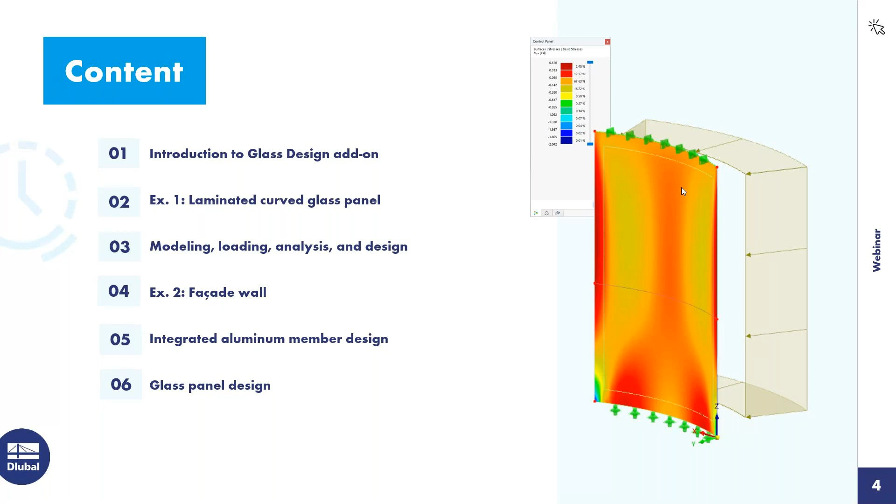Regarding the content over the next hour today, I want to begin with a brief introduction to the glass design add-on available within our program RFEM 6. We'll then move on to our first example, which is a simple laminated curved glass panel. We'll talk about the modeling and the loading, run a quick analysis, and carry out the design according to the ASTM standard.

For our second example, we'll move on to a facade wall. For this one, we want to integrate the aluminum member design along with the glass panel design, also according to the ADM standards and ASTM.

So let's turn now to a quick introduction to the glass design add-on. This particular add-on is seamlessly integrated within our FEA program RFEM 6. RFEM provides the analysis of our structure, including the modeling and the loading, but when we want to carry out the design of these glass surfaces, we do need this particular add-on.

This add-on also allows us to define monolithic or laminated thickness types, as well as working on the insulated glass design. We'll cover this more towards the end of our presentation today.

Within the RFEM 6 program, we have access to our material library for glass materials and foils, but you can also create your own user-defined materials. We have the ability to specify the shear coupling behavior between the laminated glass layers as fully uncoupled or release, or fully coupled or rigid.

We utilize what we call the laminate theory to calculate the panel stiffness, considering all of the various layers within a laminated glass panel. We apply the laminate theory to come up with the stiffness matrix for the overall surface. We'll see this in our example today.

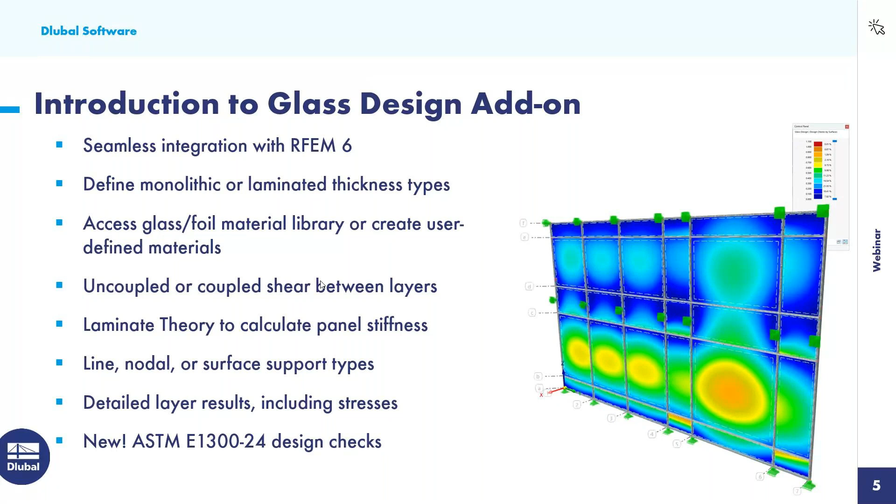We'll turn now to specifically the ASTM E1300 and how this is integrated within the program. The first thing to note is that we can generate the load combinations automatically according to the ASCE 7, but it is required that when we enable this glass design add-on that we choose the ASCE 7 glass load combination generator.

The reason why this varies from the standard ASCE 7 is that for our various load cases, we now have enabled the load duration factor. This is needed to carry out the strength design of our glass panels.

The IBC is also a little bit more clear about serviceability limits for glass or members that are supporting glass panels. So we are going to generate the load combinations for this type according to the IBC and Table 1604.3 for our serviceability or deflection checks. Again, this will make more sense as we move through our examples today.

From the ASTM, we are going to calculate the max allowable tensile stress for each surface. For this, we refer to table X6.1 and X6.2. This is dependent on the glass type, the load duration that we talked about within the load combinations, and the probability of breakage.

I would recommend that you reference the ASTM in this particular section because there are some assumptions made, such as a uniformly loaded glass plate, or limitations with thickness and size in order to calculate these max allowable stresses. If you don't fit into these particular criteria or recommendations, then you would want to use your engineering judgment, as perhaps a general stress design, which is code independent, would be better within the program.

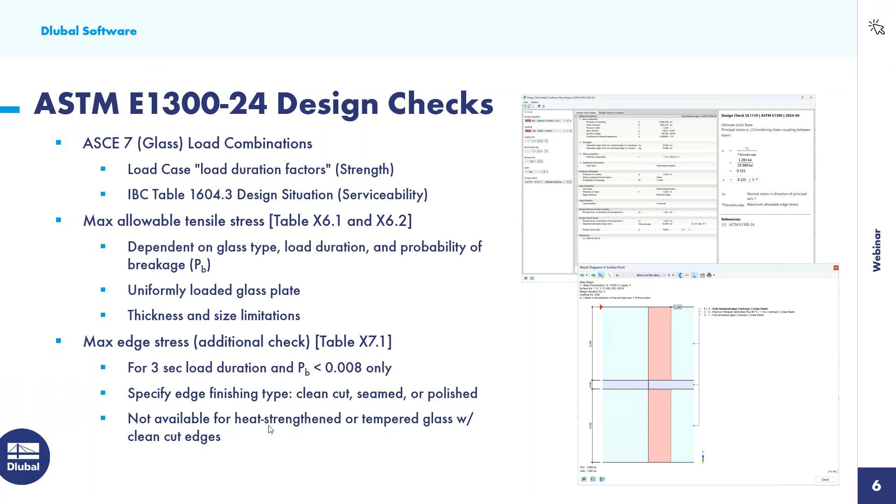Okay, so we will turn now to RFEM for our first example. When we do launch the main program RFEM 6, we will go ahead and give it a model name within the base data dialog box.

The second tab that is shown here are all of the various add-ons that we have available. So more or less, you can create your own software package that's specific for your design needs. For this first example, we will take advantage of the glass design add-on.

So under the third tab, this is where we can set our standards. The first one is the drop down to generate the load combinations automatically. And as mentioned in the PowerPoint, we do need to select the ASCE7 glass option here.

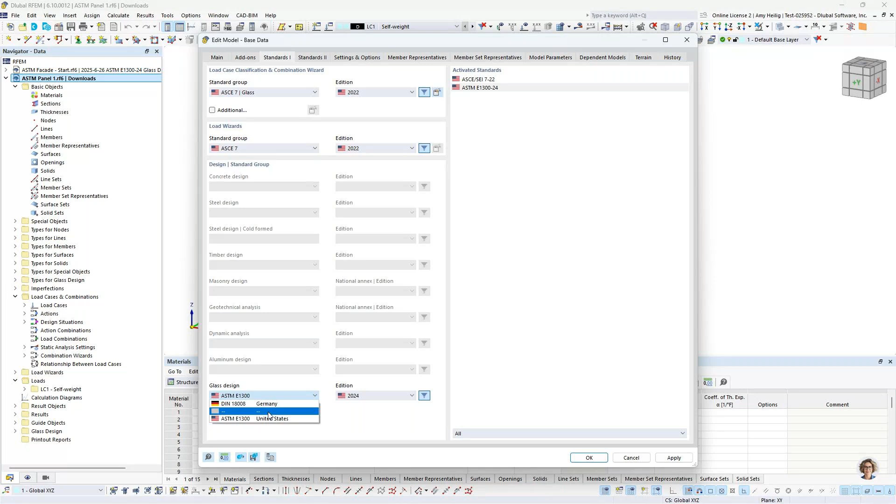The glass design dropdown, we now have the ASTM E1300, the latest 2024 standard. You'll also notice that you can choose a code independent stress design as well if you prefer. So once this information is input, we can click OK when we're brought here into the main program.

So we have our graphical interface to work with here at the center window. We have our quick tools up at the top. Our navigator on the left will include our input data as well as our results, or we can work with the table options down here at the bottom.

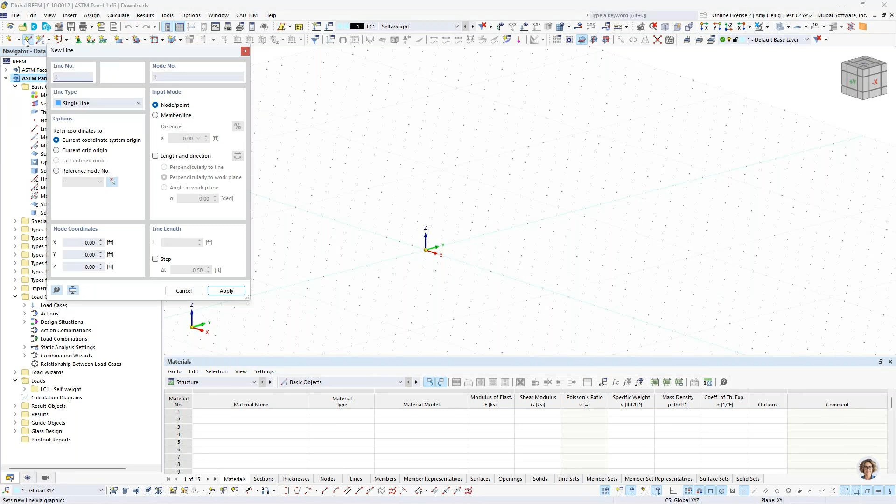So we'll begin first by drawing a simple line element. And a line element can be found up here in our tools. So rather than a straight single line, I am going to choose an arc where I can define here the start and end nodes as well as the radius.

So I'll snap here to the origin point. My second point is going to be 5 feet away in the Y direction. And then I want to either graphically select here what the radius is, or in this case, I'm going to reverse the orientation and directly type in the radius into my dialog box. I hit enter and that line element is complete.

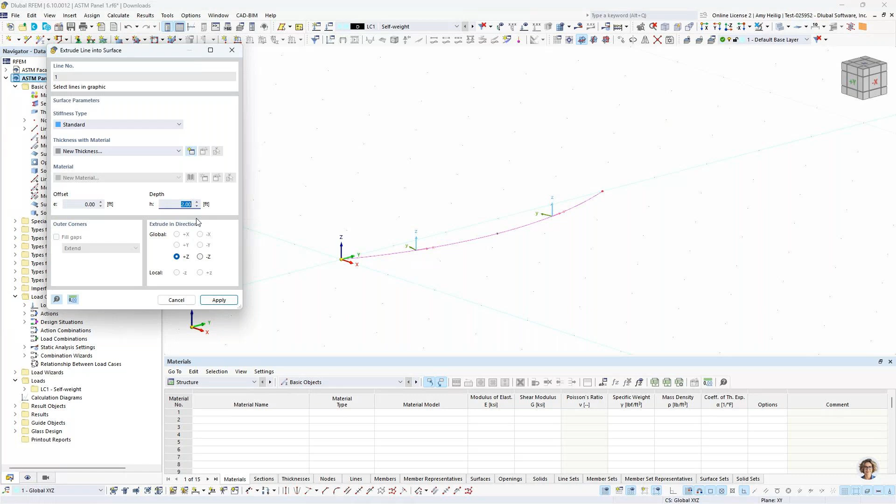So I right click on my mouse and I'm going to select this line element. We have the ability here to right click to extrude this line into a 2D surface. And I'm going to create my surface panel here that will be 8 feet in the vertical Z direction. I hit apply, I'll right click to exit out, and we have our surface shown here.

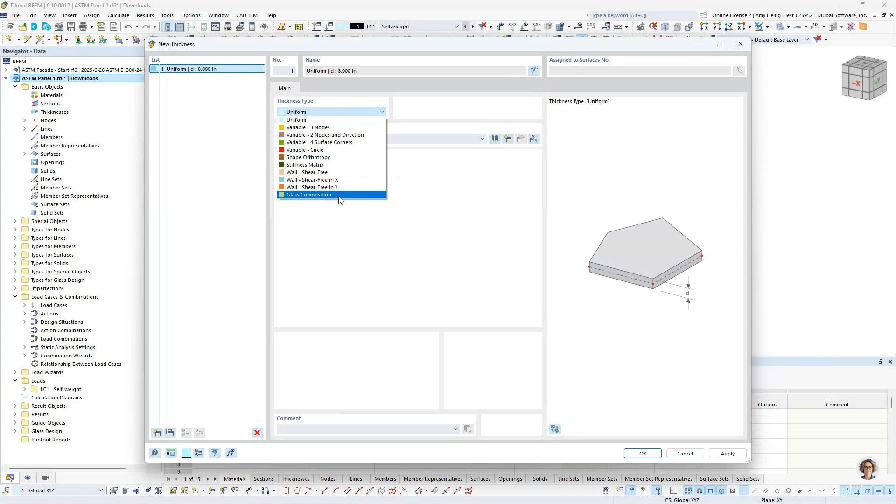Now it's currently displayed as red because we do not have a thickness or a material assigned to it. So we'll double click on this surface and we can assign here a new thickness type. We create the new thickness type within our dialog box, and under the drop-down is the option for glass composition. So if I did not enable the glass design add-on, I would not have this available option.

Under the second tab, this is where we can begin to create these layers for our laminated glass. And we'll begin under this first row for the material, defining here a new material, which we can select directly from our library. Over on the left, we have our material type dropdown that we can select glass, and we can further select the ASTM standard.

So we have 3 different glass types available here, including a fully tempered glass material. I can click OK, and that information is brought into here.

Now, if your glass material that you're using is not found in our library, what I would suggest is to choose one of the options as a template. And then we can always come down here to select user defined, and then we have the ability to modify the material properties directly. We can rename this material, but for today's example, I'll go ahead and use the material available to me within the library.

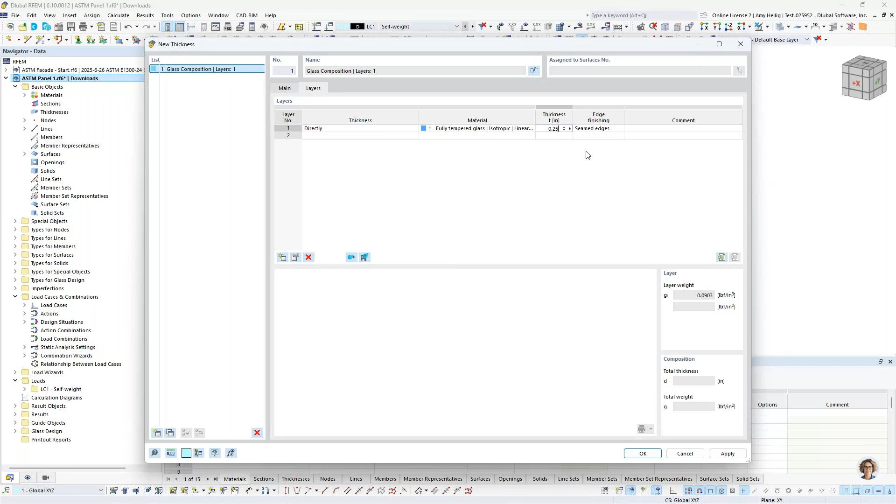The thickness type is going to be 0.25 inches for this first layer. And then the edge finishing. So you remember from the PowerPoint, we can go ahead and check those edge stresses, but we need to know what type of finish from this dropdown. So we'll go ahead and select polished edges for layer number 1.

Layer number 2, we will create a new material, once again, from our material library. And this time, instead of the material type set to glass, we're going to choose foil. Now, we do have some code-independent materials available, such as PVC, or we can use our drop-down here to select the ASTM again, and we do have the manufacturer SentryGlas implemented here. So we can go ahead and select one of these products.

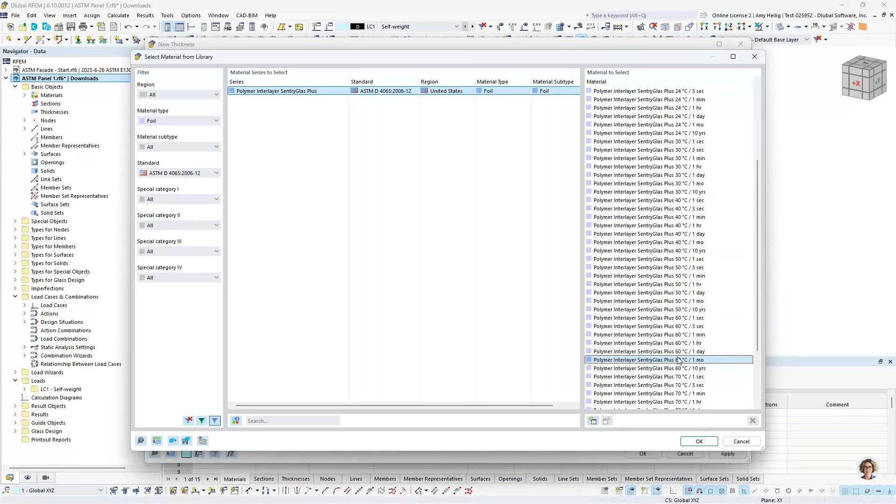I click OK, but once again, if you don't see your foil type, you can always turn on the user-defined option here. So we import that in as our second layer, and we're going to set a thickness of 0.03 inches. Our third layer is going to be the same fully tempered glass. It's already available within the RFEM model. I don't need to redefine that material type, and the thickness will be 0.25 inches here.

So a couple more things to note, that this is a very symmetric laminated glass composition. If it was not symmetric, let's say we had maybe a thicker or thinner layer 1 or layer number 3, we would want to pay careful attention here to the local z-axes shown and ensure that the local z-axes are oriented in the correct direction once we do assign this thickness.

The other recommendation is that if we're continually working with these same laminated thicknesses, with these same layers, is to save this to your library. So you can save it as a template, you can give it a name, and this way for any future RFEM models, you don't have to keep redefining these layers, but just simply pull them open from your template.

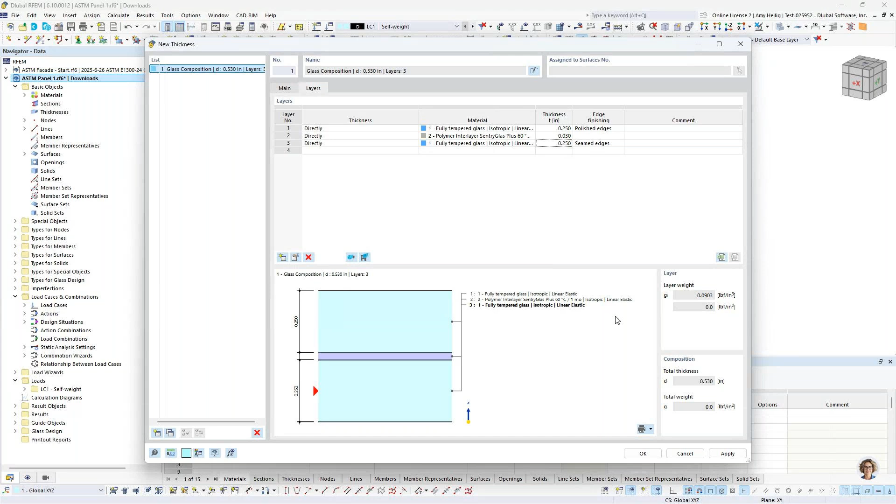So once this information is defined, what you'll notice here is that our surface is no longer red. It's now assigned a color because we have a thickness and a material also assigned to it. Now over on the left in the navigator, we have our various folders available to us, and one of them is the types for glass design. So the program has automatically created a composition when I have defined this laminated glass.

And this is going to be where we specify here the shear coupling behavior between the layers. And within this dropdown, we have fully coupled, which is a rigid coupling at the boundary edges, or uncoupled. So we'll go ahead and leave this as uncoupled for our example today. The third tab is the stiffness matrix.

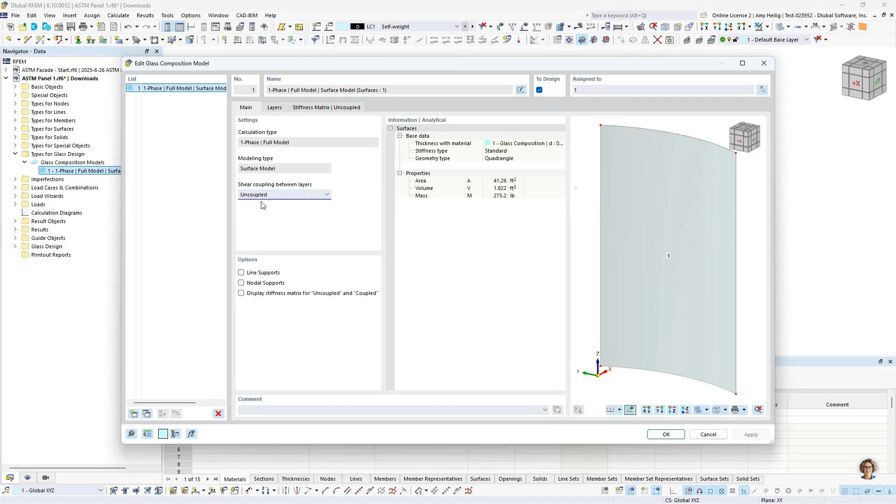So as I mentioned in the PowerPoint, we are applying what we call the laminate theory to calculate the stiffness properties for the entire panel itself. So we're considering all 3 of those layers. We apply the laminate theory, we determine what the stiffness is, and this is what we're going to use in the analysis within the base program. So very powerful in the sense of being able to calculate all of these stiffnesses automatically.

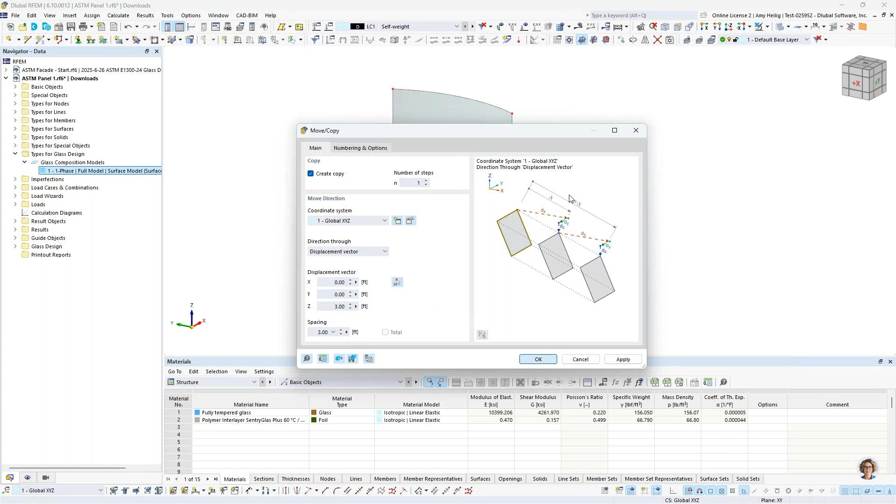So once this information is complete, we will continue with the modeling workflow. And let's assume that we maybe have some type of handrail on this glass panel that we want to consider for loading purposes. So I'm going to take this bottom line here, highlight it, use my Move Copy tool to make a copy 3 feet in the vertical direction, and I click OK. So now this line element will be fully integrated within this curved surface.

Now you'll notice a couple other symbols here for what we call surface cells. Those are not needed for today's example. So under our second tab within the navigator under special objects, we can go ahead and deactivate that graphically.

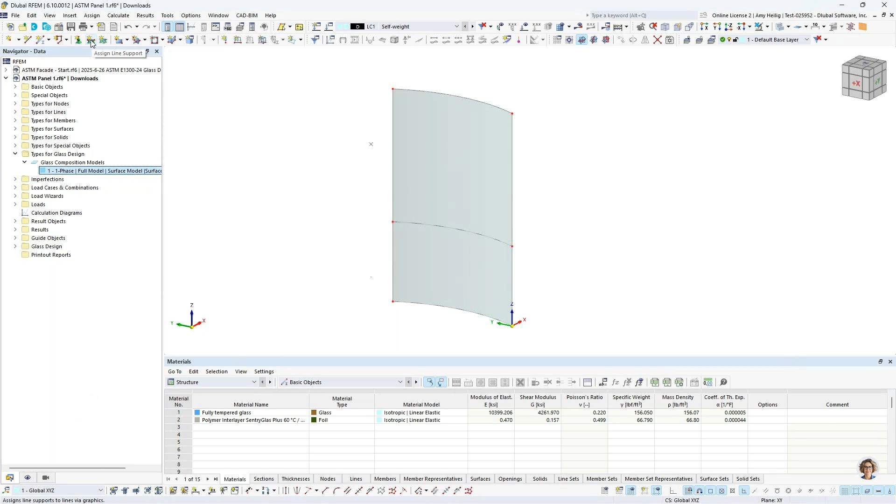Now, finally, we do need to support this panel. So I'm going to apply a new line support, which is available in my Quick Tools up here at the top. And for the bottom, I'm going to take advantage of this predefined support type, which is just a standard hinge support condition. So I go ahead and click OK, and I will select the bottom of the panel here, the bottom line.

And for my top support, I'm going to once again go to a new line support, but this time I want to create my own definition type. So what you'll notice is that we have 6 degrees of freedom, 3 in translation, 3 in rotation, where we can fully fix or fully release this line support type. We have spring constants for partial fixity, or because RFEM is a nonlinear analysis program, we can assign a nonlinear behavior type to this support condition.

Now for the top of my panel, I simply want to release the translation in the vertical direction, allowing that panel to move. But in the translation directions of X and Y, we'll go ahead and set a restraint there. We click OK, and then we can simply click at the top of this line element.

So keep in mind too, you can always right click on these symbols and use our sliders to decrease or increase the size, just depending on your model type. So we'll now move on to loading. I'm going to access our load cases and combinations dialog box here.

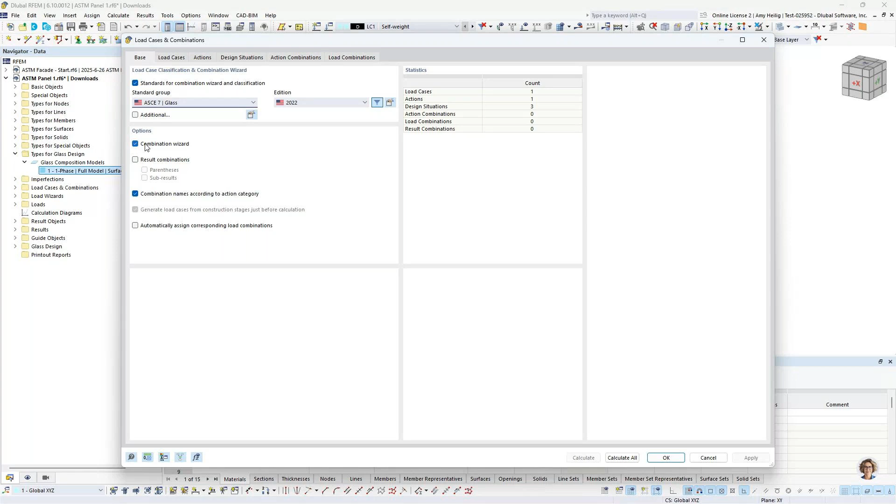You'll remember that when we first started this example, we are going to generate the load combinations automatically according to the ASCE7 glass in particular. And this will automatically be done when this combination wizard is checked on. So if I prefer to manually create my load combinations, I would just want to uncheck this instead.

Now, under the load cases, the program by default creates a self-weight load case. We'll go ahead and rename this one to dead with the action category set to dead load here. Notice self-weight is automatically accounted for, but the load duration is something that is unique to this ASCE7 glass option. So we made some assumptions here based on the various actions of what the load duration should be, but if you'd like to make changes to this, you can use this drop down for each load case.

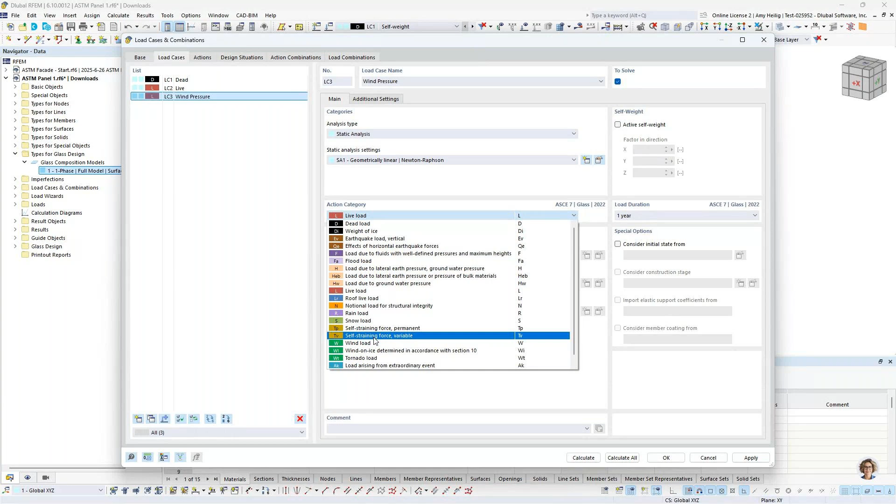So we'll create a second load case here. This one is going to be live load with the action category of live. Notice the load duration is automatically updated. We have a third load case here for wind pressure. The action category will be set to wind. This is important to note that this load duration is set to 3 seconds. So this will come into play with those edge stresses that we check later on. I'll make a copy of this one and simply rename to suction.

So now that the 4 load cases are defined here, you'll notice under the design situations, the program creates 3 design situations. The first 2 are referring to the ASCE7. So the first is LRFD, or our factored load combination. So think of design situations as nothing more than grouping together these load combinations, and we use them later on within these add-ons. Now for LRFD, my factored load combinations, I'm actually not using those for today. So I can just completely turn it off here, or if I prefer, I could delete it altogether.

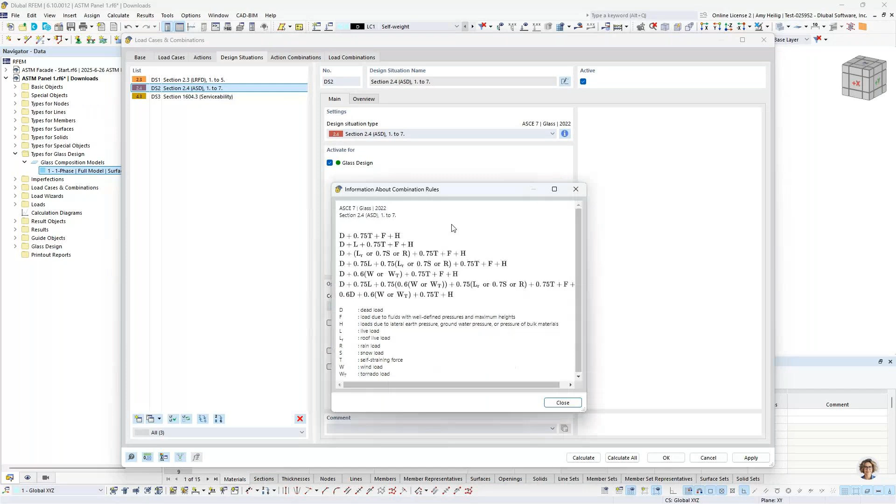The second design situation is ASD, or unfactored load combinations. We can click on the little info button here to see these directly from the ASCE7. This will be used in the glass design for our strength design. Now, finally, I mentioned in the PowerPoint, a little bit unique to the ASCE7 glass option is that the IBC is a little bit more clear about what limiting deflection should be for something like a glass panel or the members that are supporting glass panels. So therefore, we've created this third design situation, not related to the ASCE7, but rather the IBC section 1604.3 to generate these load combinations from the IBC that will be used in the glass design add-on for serviceability.

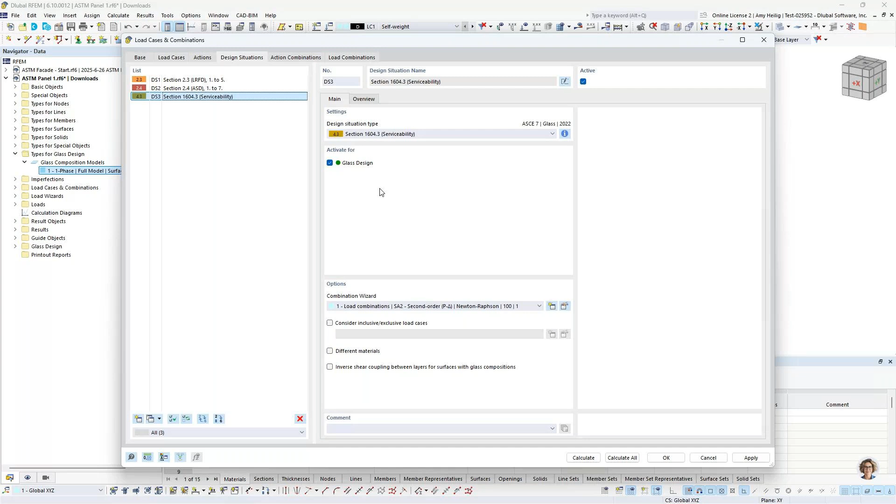So finally, under the load combinations, we can check out the individual load combinations listed. We see all of our ASD load combinations in red belonging to that second design situation. And then we see all of our IBC load combinations here belonging to that third design situation. Now you'll notice that the program by default for load combinations will carry out a second order analysis considering P-delta effects, but large deformation or third order is also available within the program.

So now that we have generated the load cases and the load combinations, we need to actually apply the loads to this structure. So we will select here the dead load from our dropdown. And I'm going to apply a new line load. And this is not to be confused with its neighbor here, a new member load. We don't have any members within this model, but a line load is applied to anything that is similar to a surface, for example. So the load direction is going to be in the vertical Z.

The load magnitude here is going to be negative 0.1 kip per feet. And then I'm going to graphically select this top line here to apply this line load, and I click OK. So now we see that line load applied at the top under the dead load case. The next load case is live load. So this is going to be for our handrail.

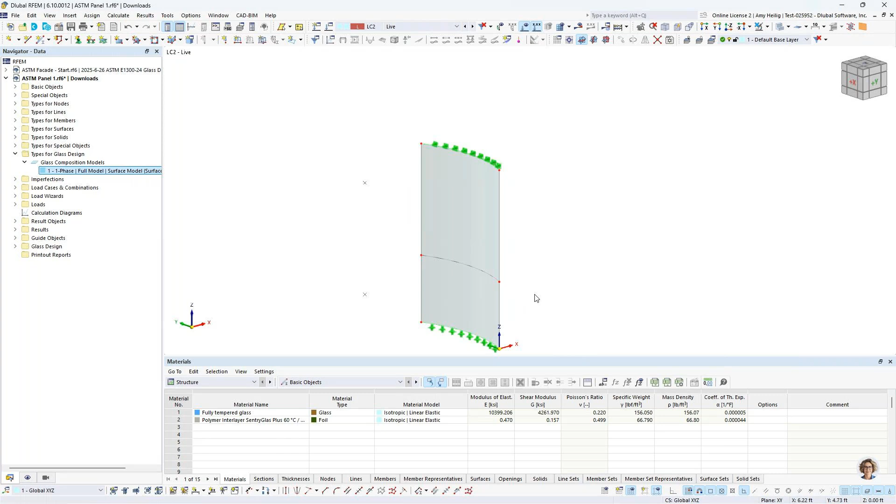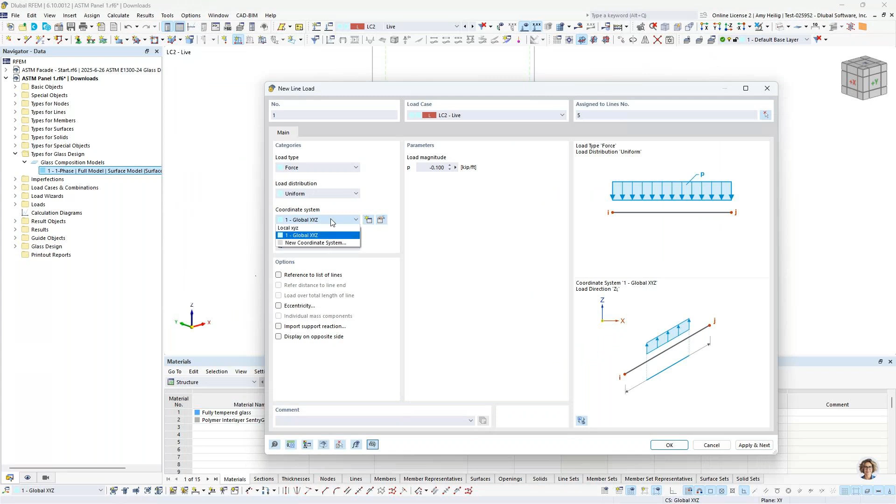And for this particular loading, I'm going to right click on the line to turn on the local axis system of the line element itself. And this way I can go back to a new line load, but rather than applying the line based on the global XYZ coordinates, we're going to modify this to apply it to the local lowercase xyz of the line element itself, and in particular in the local y direction. So we select that here from our dropdown, and our magnitude is going to be negative 0.07 kip per feet.

Line number 5 is already selected here. I click OK, and now we can see that live load applied to the handrail location. So we'll go ahead and turn off the local axis system of our line, and we'll move finally on to our wind loading. So for this one, I'm going to right click to turn on the local axis system of the surface this time, so we can see that displayed here.

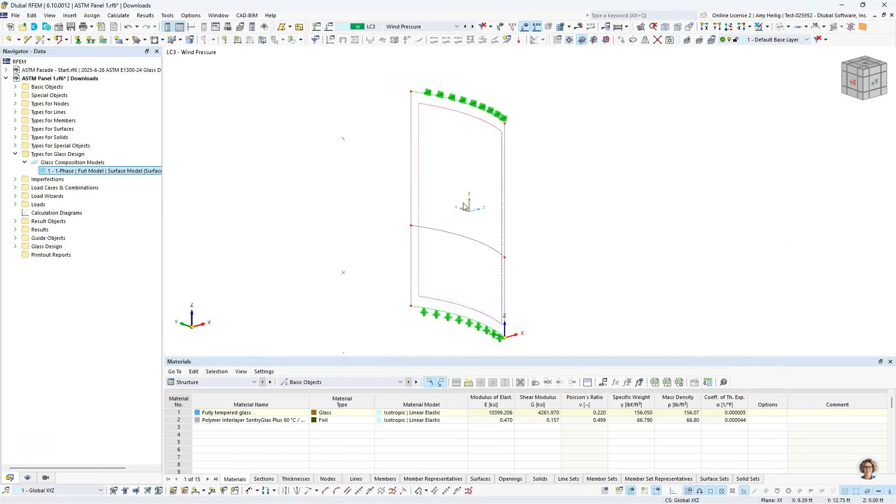And I'm going to apply a new surface load. So we select the surface load dialog box, and again, very similar to the line element, I'm going to modify this to the local XYZ coordinates of the surface itself rather than the global XYZ. The load direction will be in the local lowercase z here, which is already selected. And our magnitude is going to be negative 0.03 kips per square foot. You can see surface number 1 is already assigned. I can click apply and next.

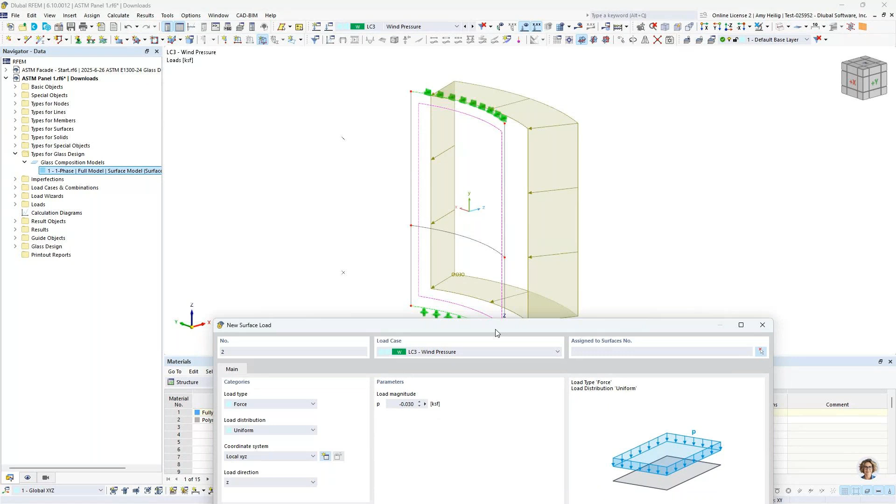So I still remain within this dialog box to continue making changes, but we can see that this load was applied in the background here as a wind pressure normal to the face of the surface. So this way I can toggle down to wind suction and just make a quick modification here to my magnitude of 0.015 assigned to surface number 1, and I click OK, and now we have this additional suction load shown here. So I have the ability to display these loads together based on the load combination, where the relevant load factor will also be displayed here graphically.

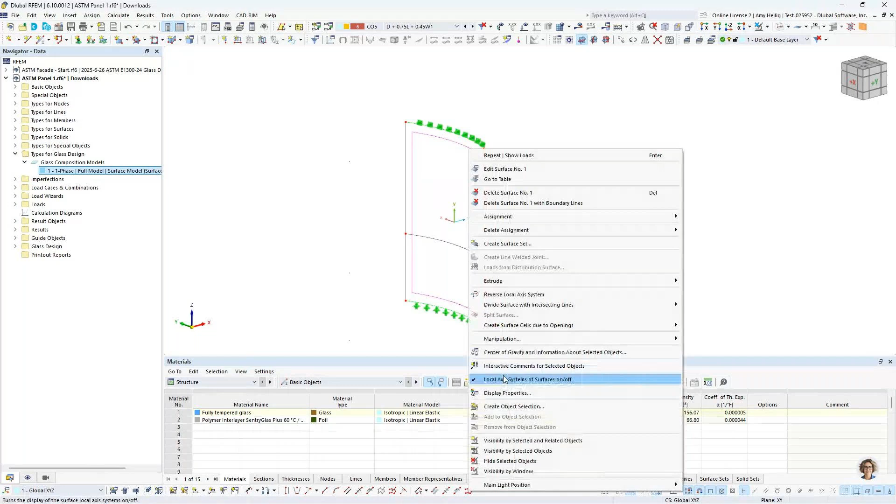So before we move forward with the calculation, a couple more things to take a look at. The first is going to be our mesh settings. So let me right click here to turn off the local axis system. And under our tool up here at the top, we have the ability to quickly generate the mesh. And by default, the mesh size is going to be 1.5 feet for any new model. And we can see that this is entirely too big for this panel.

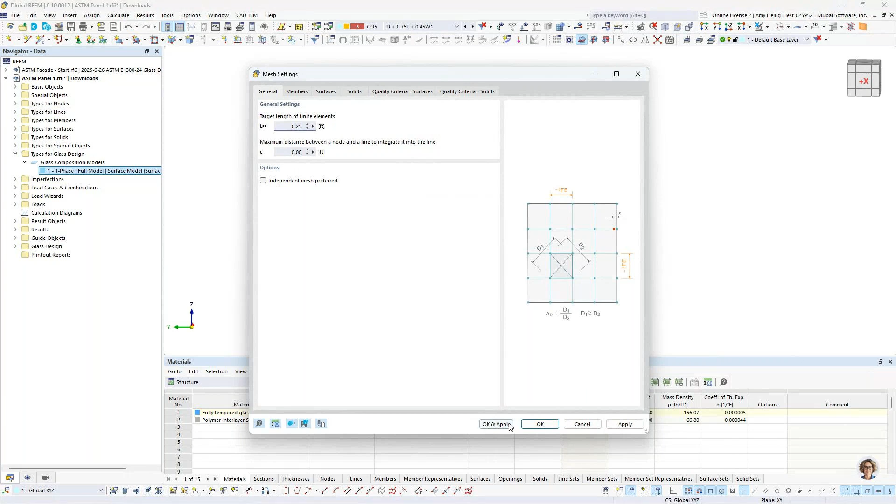So within the same dropdown, we can access the mesh settings, and modify this to a smaller value of 0.25 feet. I click OK and apply. And what you'll notice now is that we have a much smaller mesh generated, which looks much better for the FEA calculation.

Okay, the final thing to talk about, and I'll go ahead and turn off the display of my mesh, it still exists, we're just turning it off graphically, is to double click on this surface. So you'll notice we have the design properties shown within this dialog box. This is telling the program that not only are we interested in the analysis within the base program, but we're further going to design it within the glass design add-on.

Now, when I turn this off, notice a couple tabs up here disappear. That's just simply telling the program I'm more interested in analysis than design. But of course, we want to carry out the design. So let's take a look at these additional tabs. The design configurations has everything to do with strength and serviceability specific to the ASTM. So looking at the default option definition here for strength design, you'll notice the first input has to do with the design stresses that we want to design for once we are within this add-on.

And for this, I'm going to jump back to the PowerPoint to explain this in a bit more detail. I think that when we do carry out an analysis, it can be a bit confusing because there's so many stresses that are available to us within something like an FEA program. But when we are specifically looking at glass design, we typically look at tension stresses. Now, that's not to say that for specialty projects, we don't need to look at additional stresses. So for example, if we're designing a glass staircase, we may be interested in some of the additional stresses that are given to us. But referring now to the tension stresses, there are 4 of them available here.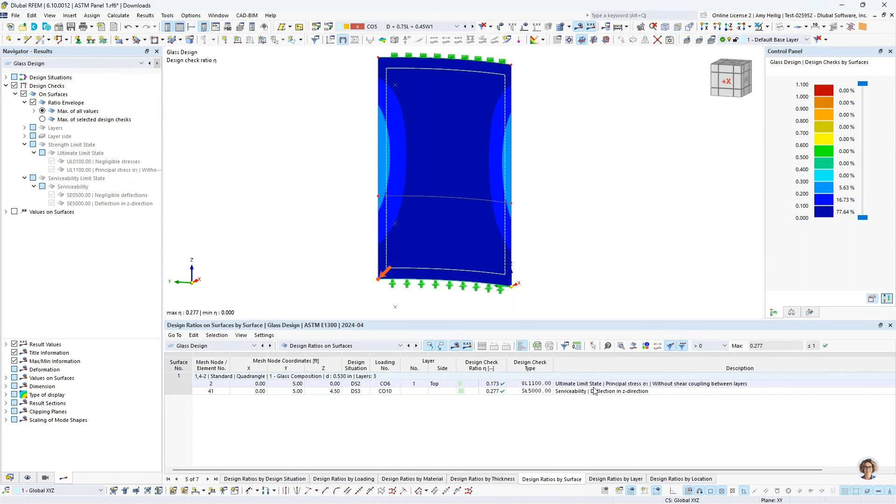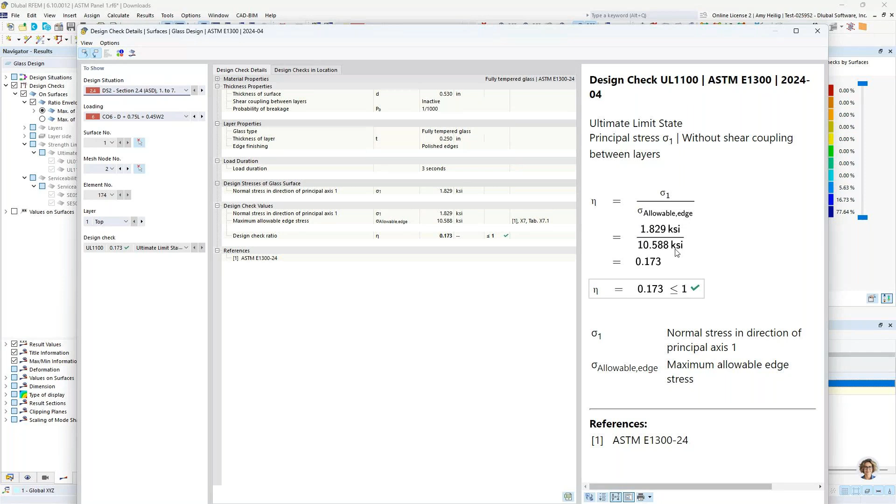We see the design ratio shown here in table format. What else you have the ability to do is expand the design check details, where we can zoom in and see the max stress from the analysis. You'll also see the allowable, and in this case the edge stress, and ultimately how we are calculating this design ratio. The edge stress is controlling for this entire panel at this particular location shown here with the red arrow.

Additionally, we can display the diagram of this glass panel. This is a cross-section view looking at both of those glass layers and our foil layer, where in our dropdown we can select the stress display, and we can view those normal stresses X and Y, or we can drop down to sigma 1, those principal stresses in direction 1, as well as sigma 2 in the principal axes 2. We can also display here the shear stresses.

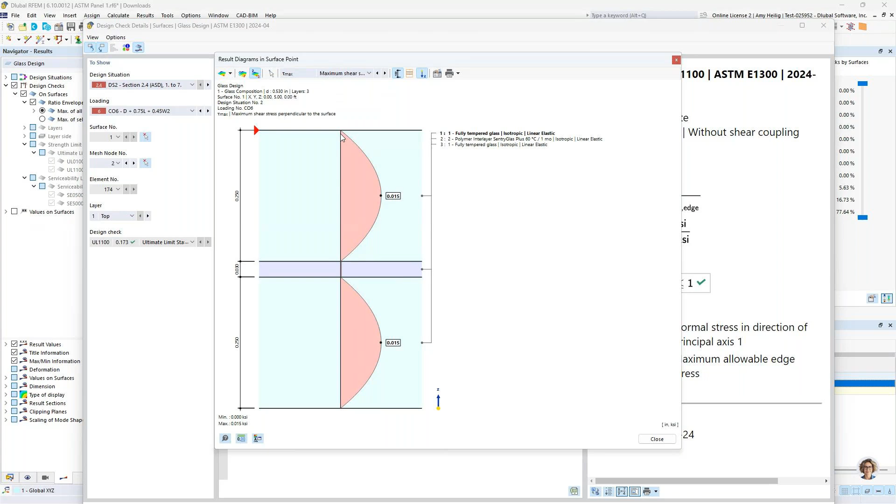We can add this as a picture to our printout report. We can add these formulas to our printout report as well. So everything is very transparent in ultimately how we're determining this strength design ratio.

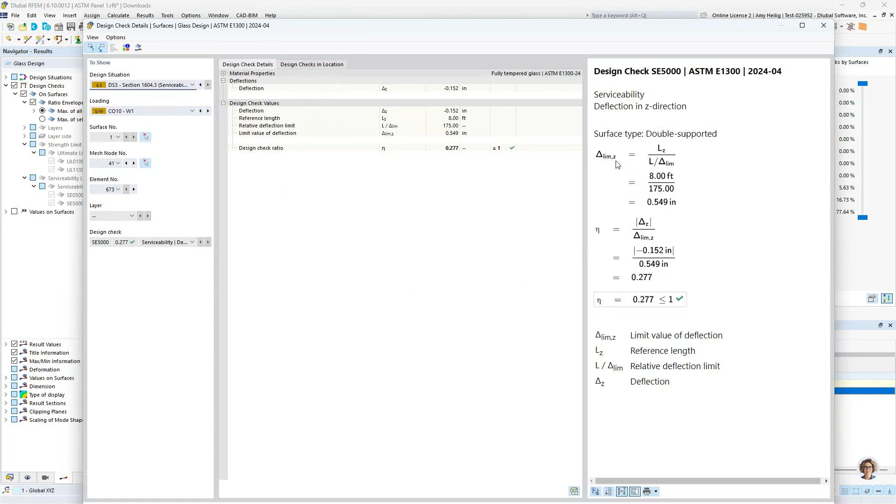Now for our serviceability check, you'll notice that the red arrow moved up here. This is where our max deflection occurs. Again, we can view the design check details here, and you'll notice that we have the deflection from our analysis. We have our limiting deflection ratio that we've set for this panel, and the ultimate design ratio shown here at the bottom. Now, this is just the two controlling checks for the entire panel.

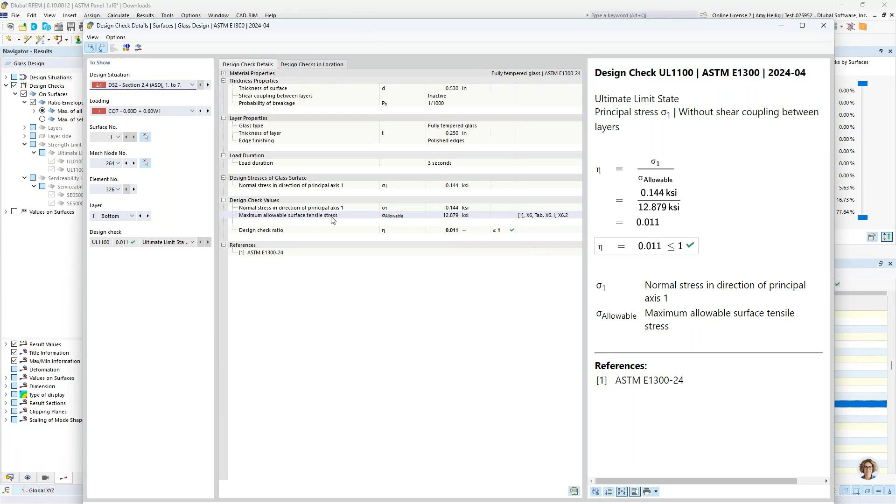If we want to jump to the design ratios by location, we will actually give you the design checks at every single mesh point within this panel. So if we jump here to an internal point instead, we are carrying out the tension stress for the principal stress sigma 1. But what should be different here is that we're no longer checking edge stresses. Rather, we're going to refer to table X 6.1 or 6.2 for just the max allowable tensile stress instead, because we're not within that boundary for the additional edge stress checks.

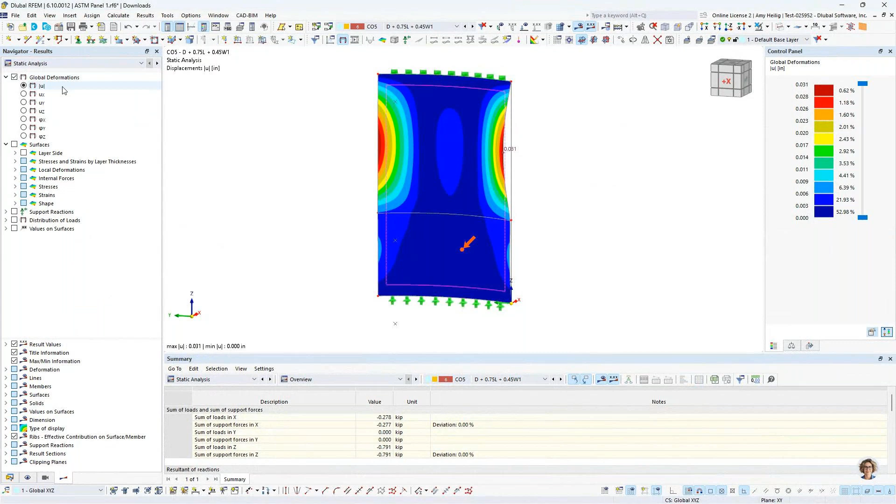Now, this was all the information specific to the ASTM glass design. We could back up a step to the static analysis within our navigator here. And what you'll notice is that on the left-hand side, we can turn on information like the global deformation, and we could cycle through these different load combinations here just to see how our panel changes depending on the loading.

We can also activate the support reactions graphically here. So the support reactions can be shown either within the graphical window or in table format. We see the results by line, and we're going to be able to see those support forces here where we can export out to Microsoft Excel at the click of a button or any other information that we're interested in in table format.

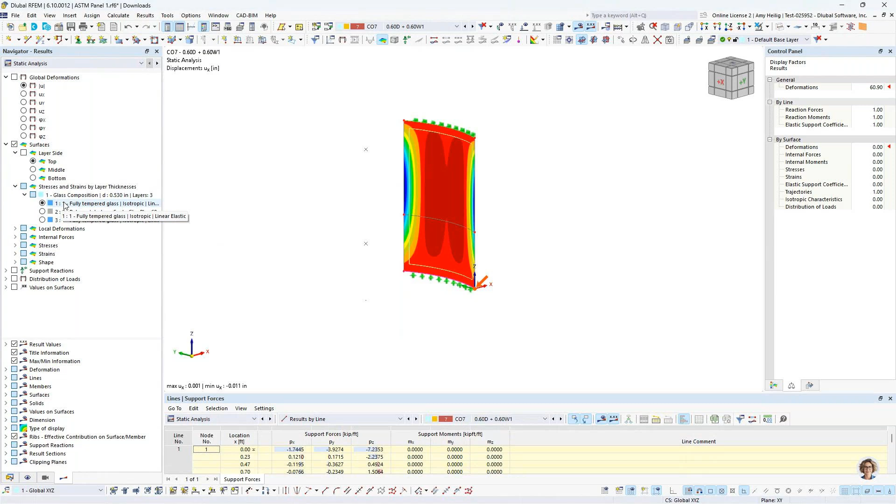Now, we also might be interested in the stresses. So what's really cool with the glass composition is that you'll notice we have the ability here to select the particular layer, layer number 1 for example, and I can activate my principal stress, sigma 1, but I can view this on the top layer side. So we're currently looking at layer number 1, the top side. I can toggle this to layer number 2, the bottom side, and see the relevant principal stresses here. Or I could jump to that third glass layer and view the stresses at the top or at the bottom as well.

So not only do we have the ability to view information for the panel as a whole, but we can really drill into each one of these layers to view the various stresses at the top, middle, or bottom side of the layer itself.

Okay, so that will conclude our first example today. We want to now move on to our second example. This might be a little bit more interesting because we want to integrate a full facade wall design.

So I want to first begin in our standalone program, RSECTION. Now, it's pretty common with something like a facade wall when we're integrating this with glass panels that we might have custom aluminum extrusions. So the powerful thing about RFEM is that we can carry out the design of these supporting members along with the glass. So that's what I want to show you today.

So starting off in RSECTION, this is our standalone where we can import in something like an AutoCAD file, and that's what I've done here. We have the ability to calculate the cross-section properties of this pretty complex section. Now, I have a webinar devoted entirely to RSECTION where I go into much more detail that we don't have time for today.

It's worth noting that once we define information like the parts and the elements - you can see these elements are highlighted as I click around - this information, once we calculate the cross-section properties, can be brought into RFEM where we can fully design these aluminum members according to the ADM.

But the really unique and powerful thing is that we can also check local buckling according to Chapter B. I think we're one of the only programs, or maybe there's another one out there, but as far as I know, we're one of the only ones able to check local buckling. That's important to remember for these custom aluminum extrusions.

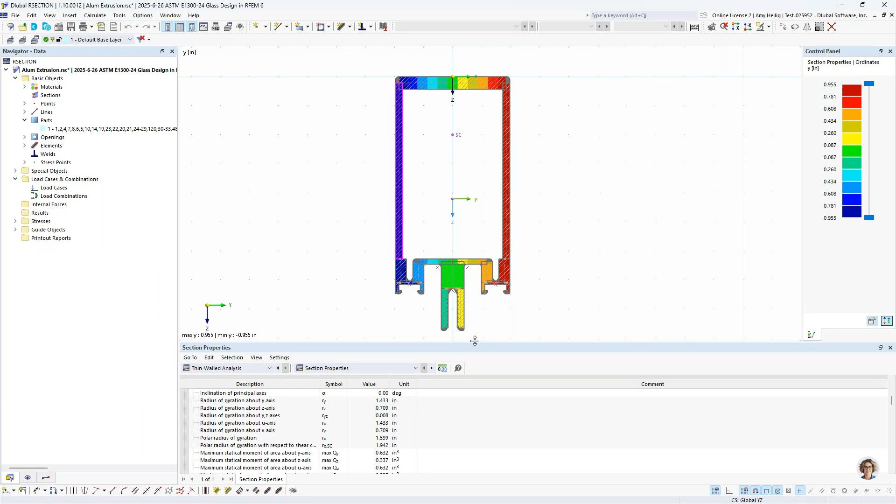Once we run the calculation, we're presented with the section information like area, moment of inertia, shear area, and we would want to save these results to a folder on our computer. Then we are going to go into RFEM.

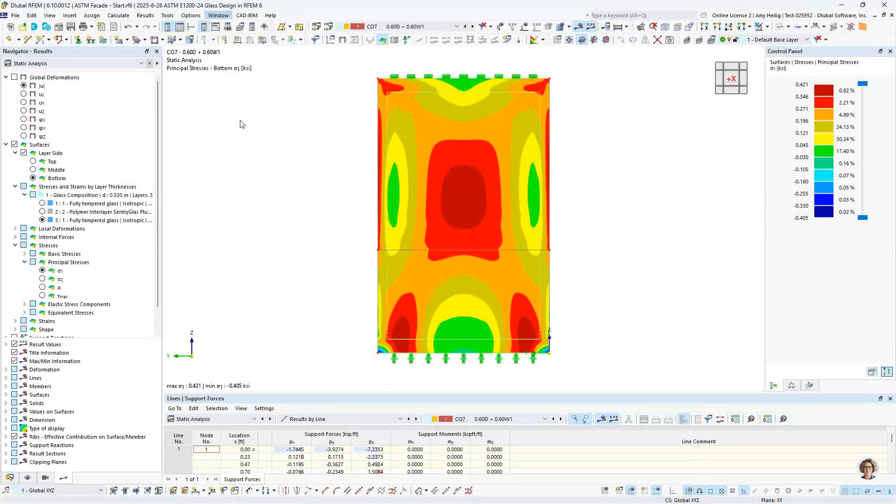For the sake of time, I have already modeled these aluminum members, and we'll get into that in a minute for a quick overview. But before that, let's visit the base data dialog box - the one that pops up when you first create a model.

Again, we're going to take advantage of the glass design add-on, but I can also activate the aluminum design add-on so we can do full analysis of these aluminum structures. If we want to carry out design checks according to the ADM, we need to activate this specific add-on. Under the standards, you can see ADM 2020 is available, and we'll take advantage of ASTM E1300.

Now that this information is defined within the base data, we want to draw all of our members. To draw one of these custom aluminum extrusions as a member, I'd go up here to draw a new single member. The member type would be set to beam, and then I would define the cross section.

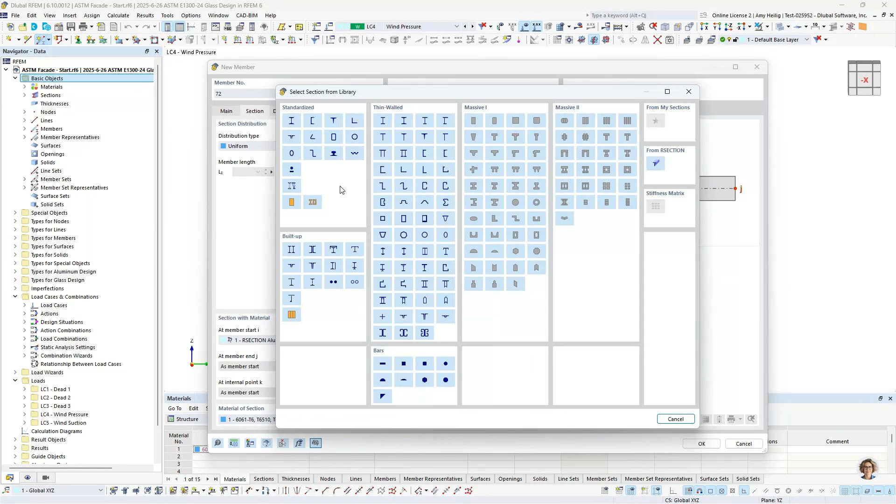Within our cross-section library for the supporting members with our glass panels, if they come directly from the ADM, AISI, AISC, or whatever it may be, all those standardized sections are available in the upper left-hand corner. We also have some other parametric sections available.

For these, you just input the dimensions and the program calculates the section properties for you. But for anything more complex, like that aluminum extrusion, we would want to import it from RSECTION.

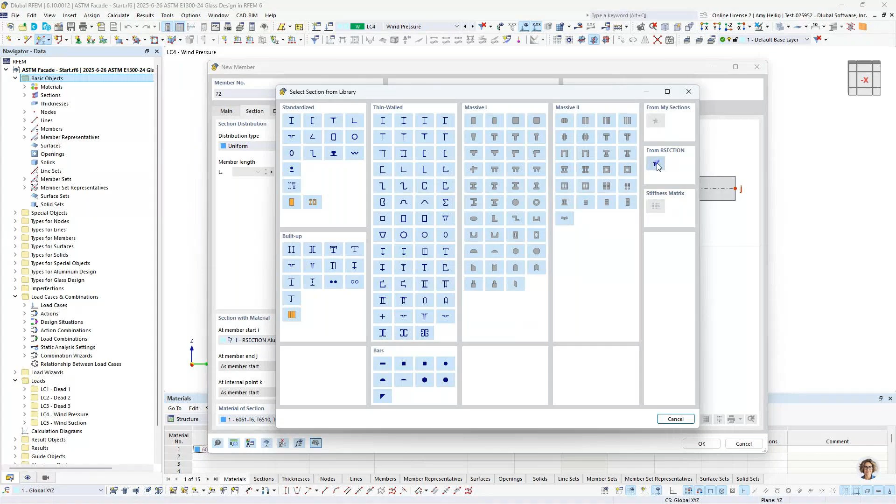Within RSECTION, you can see I could right click in the projects folder to connect a folder on my computer where I've saved this aluminum extrusion. That's what I've done here - I've calculated the results and saved them to this folder, so we can bring that into RFEM.

What we'd normally be presented with is this dialog box where we get a nice rendered view. The material was already brought in from RSECTION where I defined it, but I could always change it here to a different aluminum material from the library, where we have all ADM materials available.

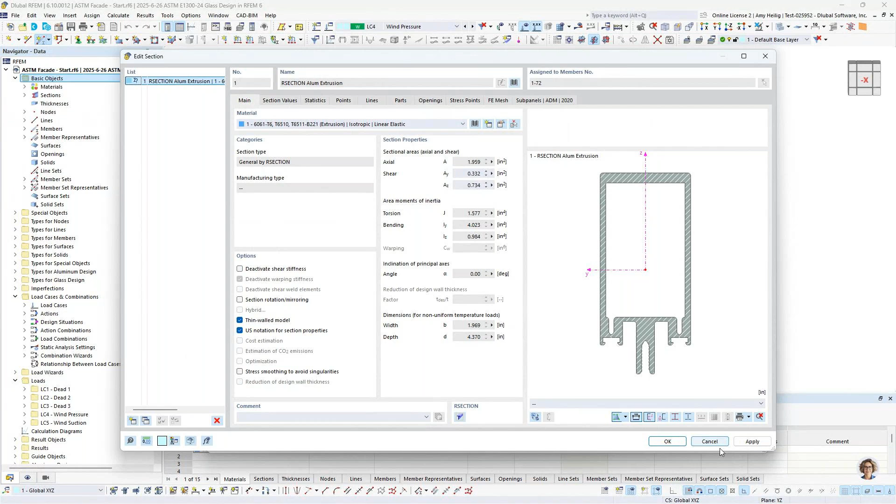Once we've imported this section, it's also noted that when we draw members, the program assumes each member that connects to the adjacent one is fully fixed.

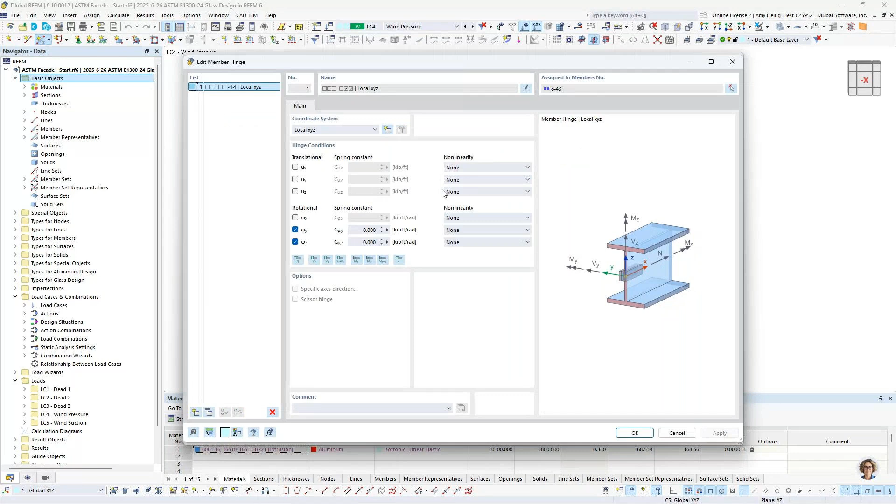So if we want to add something like a moment release, we just need to activate the member hinges. This is where we could define a new member hinge type, which I've already done in the program, where maybe we want to release the moment about the local Y and local Z axes. We could apply this moment release at both the member start and the member end.

So I would go ahead and utilize my drawing grid here and draw all of my members - again, I've already done so for the sake of time. What's also nice is I'll turn on the display of only one of these members.

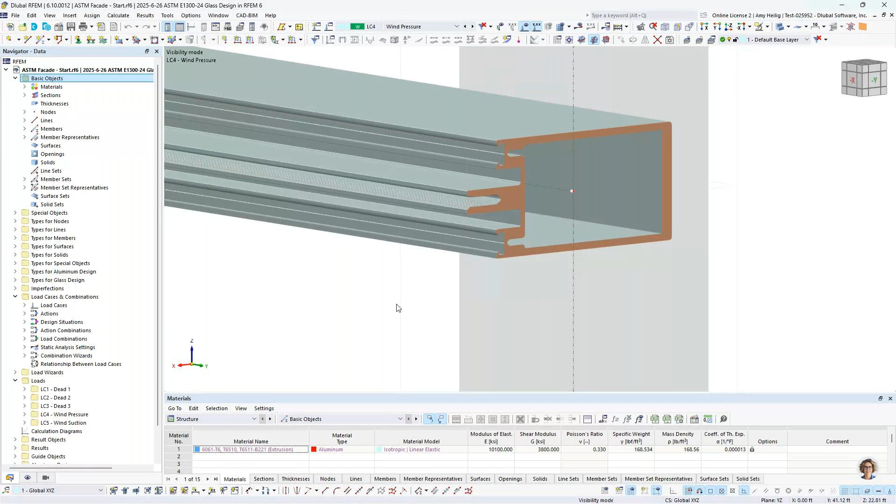When you import from SHAPE-THIN, we give you a nice rendered view of these extrusions, so there's no confusion on the orientation of the member. Other competitor programs out there just bring in a basic shape, and it's difficult to tell the orientation. But with our SHAPE-THIN integration, you can see that AutoCAD DXF file was automatically brought in here for accurate rendering.

Okay, so we'll cancel out of this visibility mode. The other thing to know are the nodal supports applied to our structure. In our navigator on the left, under types for nodes, you'll see all the nodal support definition types as I click through them, just assigned to various nodes within our facade wall.

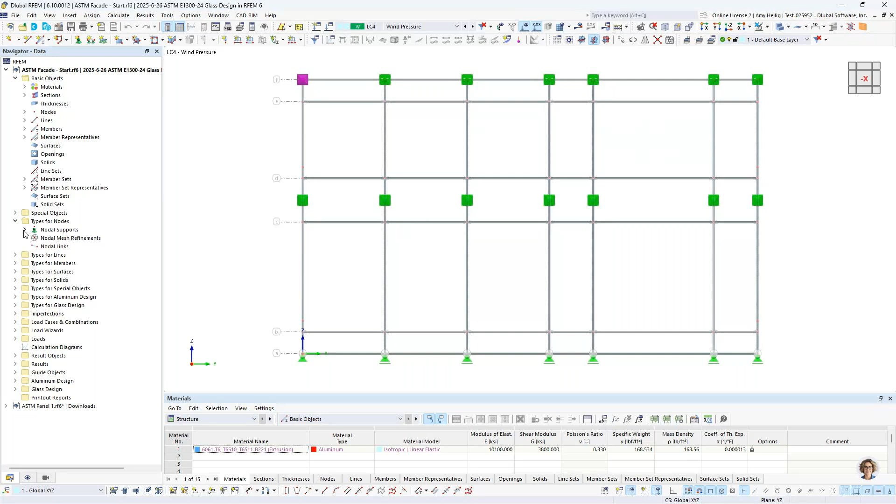So now that the members are modeled, we need to also model our glass panel. For this one, I'm just going to draw a general rectangular surface. This is not going to be curved, it's just going to be in a single plane. We want to define a new thickness type, just like with example number 1.

We're going to select here the glass composition. Under the layers, I mentioned taking advantage of our library options, defining these compositions and saving them to your library. For this example, I'm just going to choose a glass composition I saved as a template. You'll notice all of the materials are brought in, the thicknesses, the edge finishing, all automatic, so I don't have to redefine those layers each time.

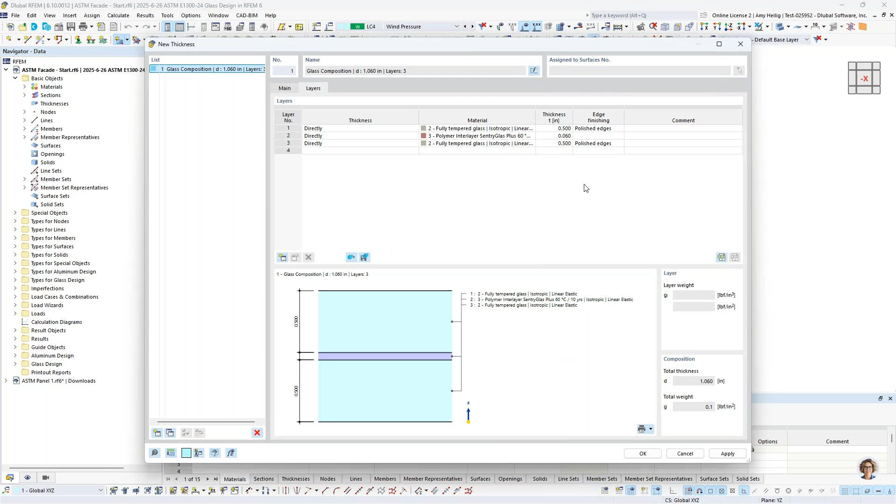Now that the thickness has been assigned along with the material, what we will do is snap from the upper left-hand corner to the lower right-hand corner to generate this surface. In the current state, this is one continuous surface, and we certainly don't want that, right?

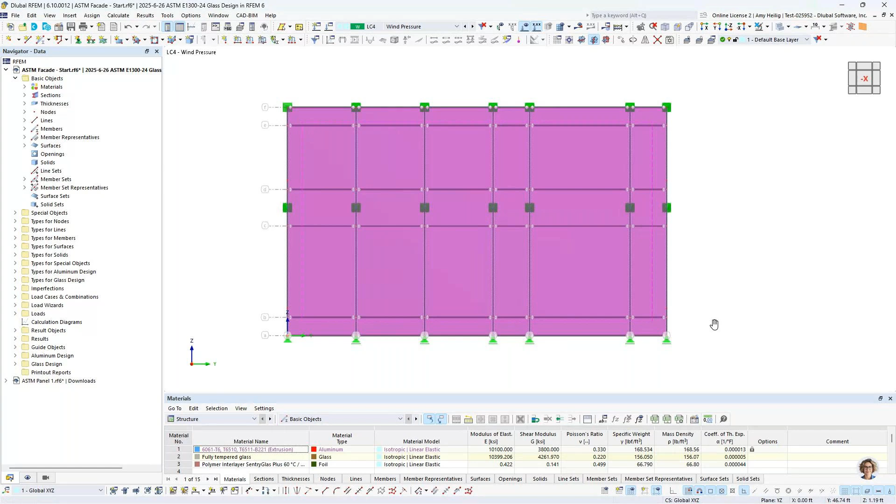We would rather infill each one of these bays that span between the aluminum extrusions with a glass panel. So we have a nice modeling feature where I can right-click on this surface and divide it by the intersecting lines. Now you'll notice that I have individual glass surfaces spanning between these aluminum extrusions.

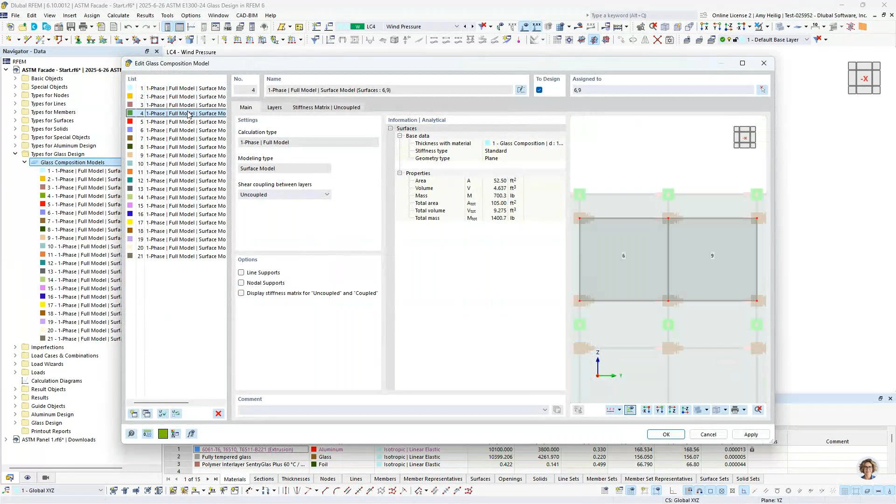Going back to my folder here, similar to example number 1, let's take a look at the glass compositions. The program actually creates a separate composition for surfaces that share identical geometry, and this will come into play later as we develop the insulated glass panel design. But for now, that's why separate compositions are created. Some compositions might have 2 surfaces, some might have 1, or some might even have 3.

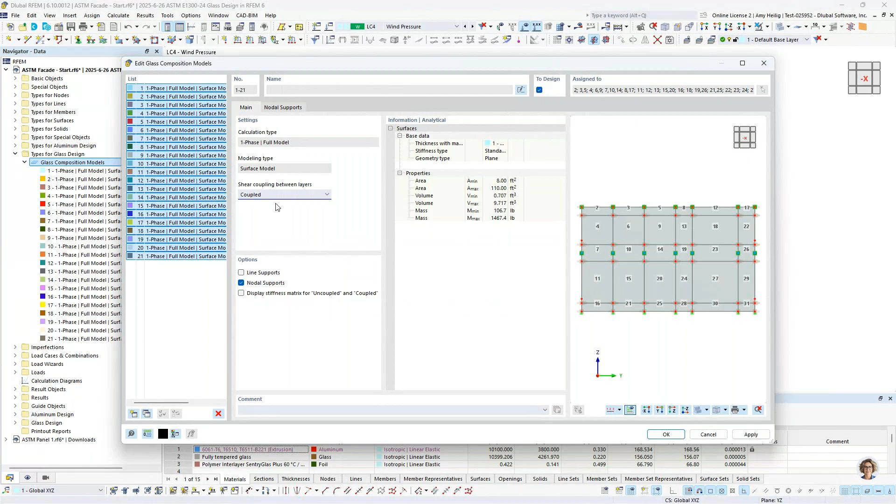For all of these, I can just hold down my Shift key to select all of them. For all the panels today, I want to change this to a rigid coupling, so I go ahead and make that composition change. I click OK, and now that's applied to all of my glass panels here.

Now I'm going to select all of my surfaces and we can double click on them. Again, exactly identical to example number 1, we have the strength and serviceability configurations. I'm not going to make any changes here. We're going to leave all of those as default to what we have already covered before.

The only modification I want to make here is I would like my reference length to be the maximum boundary line for my glass panel for my deflection checks. And that's all that's required here for our glass input.

Now, one thing to mention, these glass panels are rigidly connected to these aluminum members. If you have a scenario where maybe we want to account for some type of slip, or maybe we want to release the moment depending how these glass panels are attaching to these aluminum members, we can always go under the option here, types for lines, and apply what we call a new line hinge.

So if I double click on this, you'll notice we have 3 degrees of translation, and then we also have our rotation. We have the ability to completely release the moment, for example, of the glass panel to the aluminum member, or if we wanted to account for some type of slip along the length of this connection, depending on our project type, we could input a spring constant here. So that is always available with these line hinges.

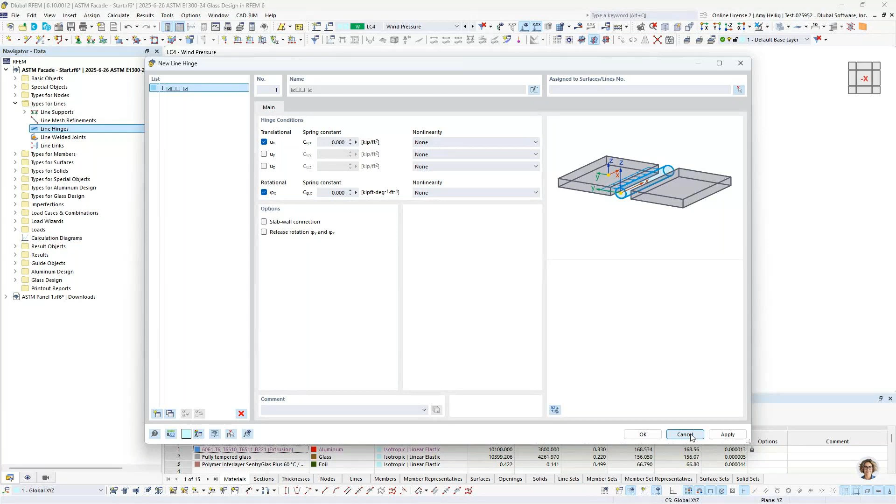Now for today, I'm just going to consider everything as a fully rigid connection between both the surfaces and the members. The final thing to talk about before we get into loading is just the aluminum members themselves. So I created a couple visibilities where I want to look first at all of my members spanning in the global Y direction.

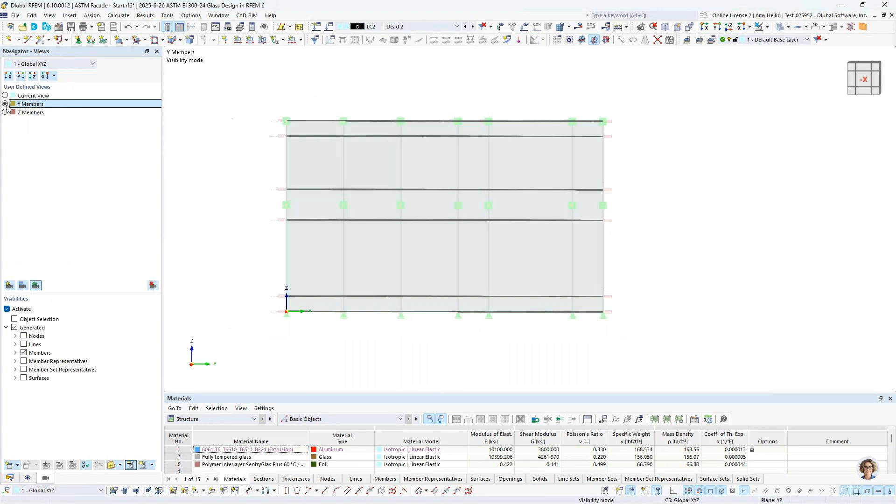So again, these are the members spanning in between the vertical members here. Now for all of them, if we double click, we have the exact same concept for aluminum design as we do the glass design. And that's the benefit of RFEM, that these add-ons all have a very similar workflow and feel. So I am interested in carrying out the design according to the ADM.

So I have my design property selected. Therefore, I have a couple additional tabs at the top that are specific to the ADM design. They do not affect the analysis. The first one to talk about is effective lengths, or what are the unbraced lengths of these members. I'll also preface that I did give a previous webinar devoted entirely to ADM member design, which I would refer you to, as we don't have much time to get into it today.

But basically, we can turn on here the stability failure modes, and those include flexural buckling in the strong and weak axis direction. Now, this is a more box type section, so perhaps I'm not concerned with torsional buckling or lateral torsional buckling, so I can completely turn those off.

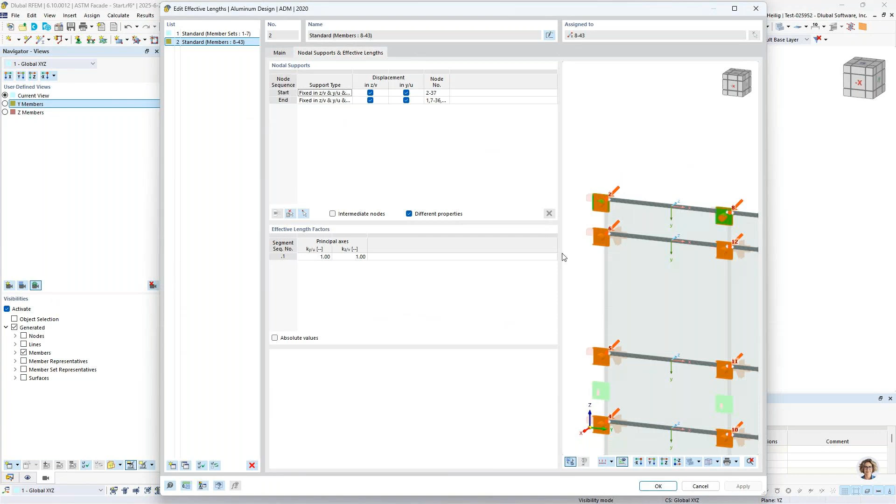But what the program does is we can place these intermediate supports at the member end. So these don't affect the analysis whatsoever. They're just used to automatically define the unbraced lengths. And in this case, it's set to the member start and member end, so the unbraced length is the full member length. But of course, we can make modifications here.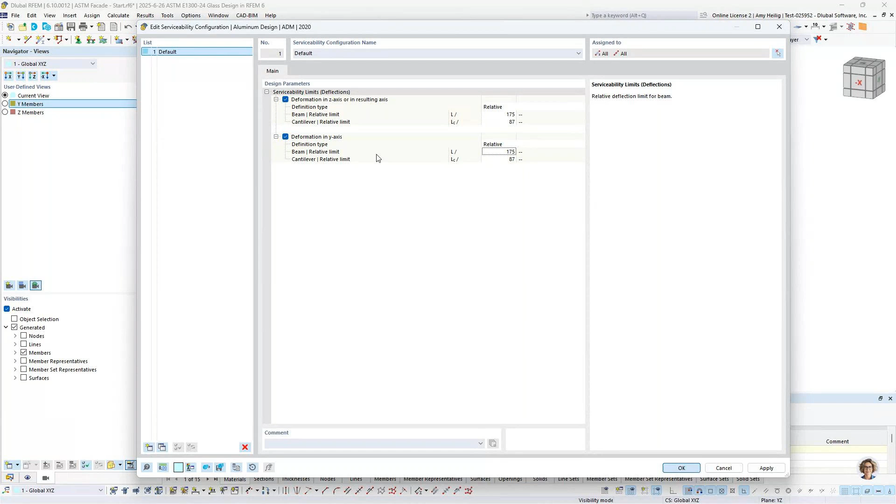So once we have input in the unbraced length, we also have strength and serviceability configurations for our aluminum design. The strength I'll go ahead and leave as default, but for our serviceability, because these members are supporting these glass panels, we need to have smaller limiting deflection ratios set here. So if we refer to something like the IBC, maybe we reduce the limiting deflection ratio for simply supported members to L/175 as well.

So once this information is input for our transverse members, we also have our vertical members. And in this case, these were modeled as separate segments. So it's entirely possible, though, to design these as one continuous member. And how we do this is we can right-click here under the member to create what we call member sets.

Now, it's also possible to keep this as one continuous member. You don't have to break it apart. So both options are possible. But once we define those member sets, it's just grouping together these individual segments here for the member design, so we can design it from top to bottom as one continuous member.

But with member sets, it's the same workflow that we just saw with our members, where we would want to input an effective length. And you can see for this one, a little bit more complicated because we have these various supports in the strong and weak axis direction framing into this member. But again, these are all used for the effective length in the strong and weak axis flexural buckling checks.

Design configurations, we have already set these, so they're going to share the same configuration settings. And then the design support, same thing for deflection. These members are supported sometimes in the weak axis, sometimes in the strong axis, just depending on the different members and support types in the global model. So we can also define here what we call design supports to be taken into consideration for those serviceability checks.

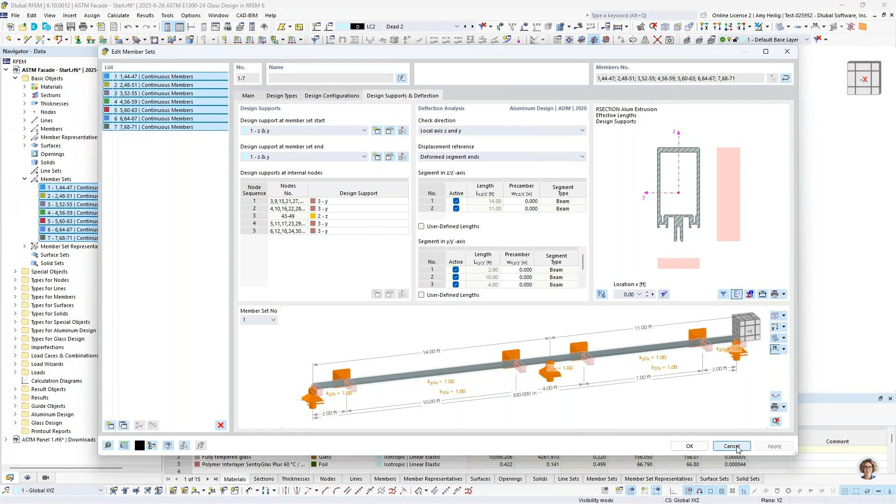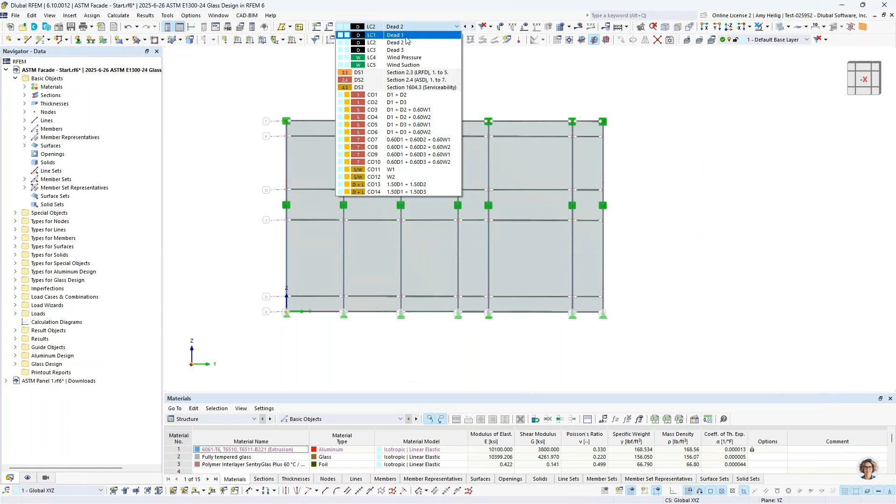Okay, so once we have input this information specific to the ADM and our aluminum members, let's take a look here at the loading. Again, really identical workflow to example number 1, so we don't need to get into the same load combination generation, but I've created 5 different load cases here. The first 3 are going to be a dead load.

And if I display the loads that have already been applied to this structure, you'll notice that if this is some type of facade, maybe we have some additional elements framing into it, and we have this downward load applied to each one of these transverse members. So this is just a simple member load where I applied it as 2 concentrated loads at 10% and then at 90% of the member length.

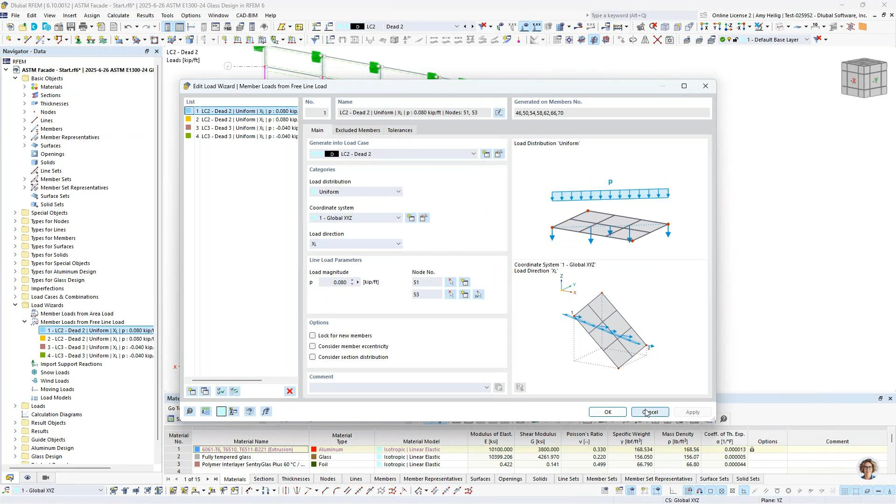The second dead load case is a really cool feature that we offer in RFEM. So under the load wizards, we have the option here to generate member loads from a free line load. Within this dialog box, we can specify the load magnitude, the direction, which is in the global x-axis, and then the start node and end node. So that's what I went ahead and did here. I just defined this basic line load across the face of my facade wall.

But I can right click here to display separately. And what the program does is it considers the tributary area of this line load and applies it automatically as point loads to each one of the relevant members in this vertical direction. So I use this for both load case number 2 and load case number 3. I just reversed the orientation here and adjusted the magnitude. Now we could always right click to display separately again if we'd like to see it as a continuous line load instead.

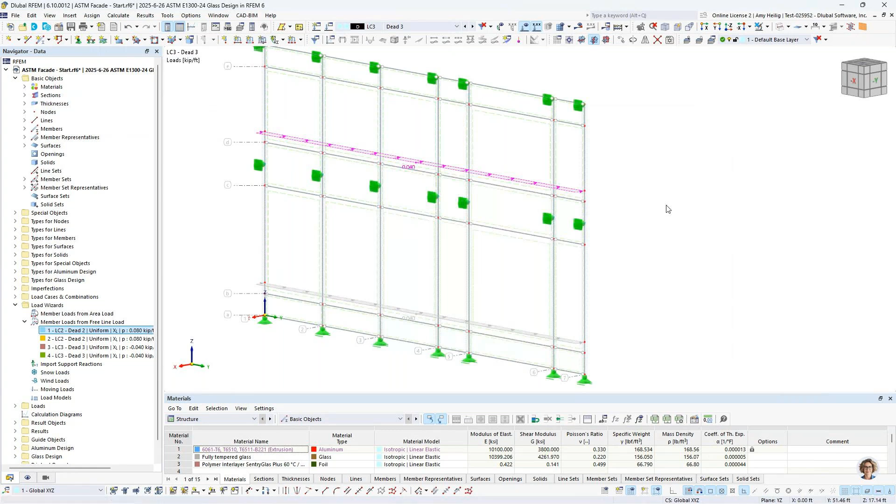For our wind pressure, we didn't previously have these surfaces modeled for our glass, so we need to quickly apply a new surface load here. And the load direction is going to be in the global X direction. The wind pressure here is going to be negative 0.015 under load case number 4, and we can select all of our surfaces, numbers 2 through 31. I click apply and next. We see that load applied here in the background.

I'm going to change the load case to load case number 5 and just simply adjust the magnitude here to 0.007 for my wind suction. Again, selecting all of my surfaces. I click OK, and now we see that additional load applied here. And if we drop down to our load combinations, we can see all of these loads applied together on the structure.

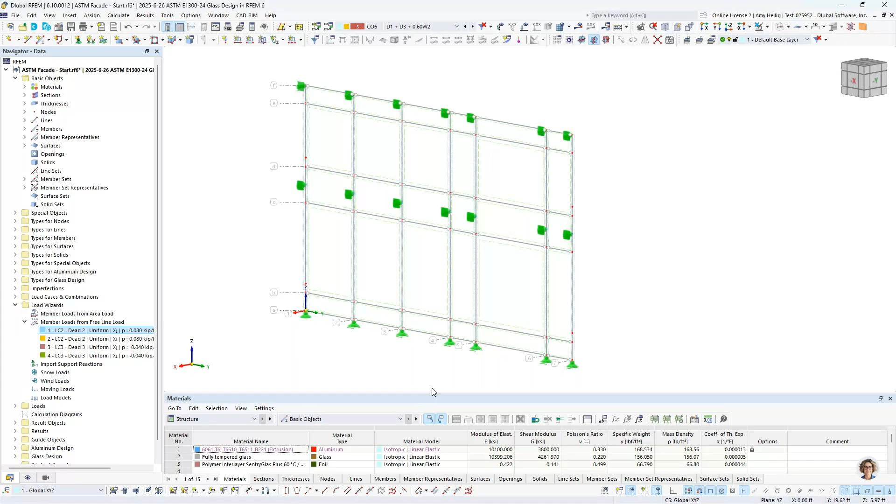So the final thing to do before running our calculation is we want to jump down once again to the glass design add-on. And remember, we have these same design situations that we had in example number 1 with our ASD load combinations. We'll carry out the strength. Our IBC, we carry out the serviceability, and we're going to design all surfaces in the model.

But we also have the aluminum design add-on as well. And you'll notice it's identical input here, that for our unfactored ASD load combinations, we will carry out the strength limit state design for ASD. Now, alternatively, if we were carrying out LRFD, we would probably want to enable this LRFD design situation here for that limit state type. I'll go ahead and use the IBC load combinations to carry out serviceability or deflection checks as well for my aluminum members.

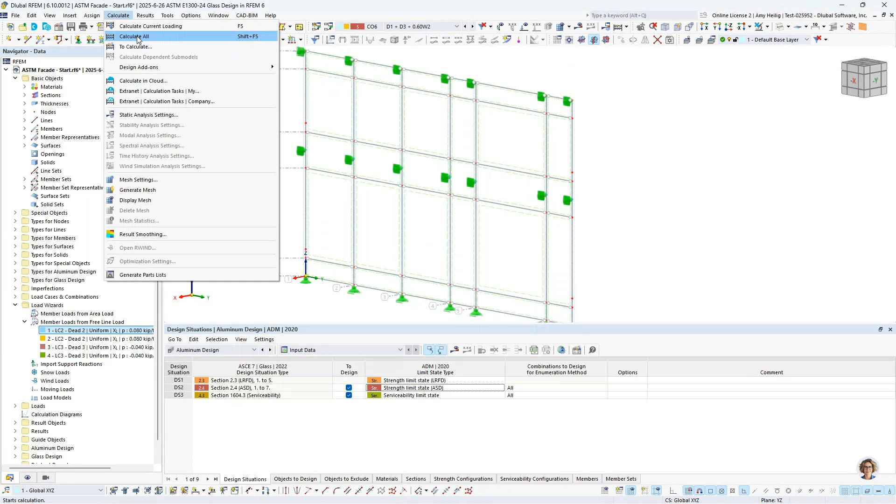So when we're done with that, we can go to calculate all. Now the program will go ahead and generate our mesh for us. And we would want to ensure, just like with example number one, that that mesh was small enough. But what the program will then do is to run through each one of the load cases and the load combinations that we have defined here.

So once we have the internal forces for our members from the various load combinations, we are going to bring them into the aluminum design add-on. And this is where we are going to apply, again, taking a step further from the static analysis to now the design according to the ADM, all of our design equations from the various chapters for both the members, and then you can see here it's now working on the member sets. So once this information is done for the aluminum design add-on, we take the results again from all of the load combinations here and we bring them into the glass design add-on to also carry out that design.

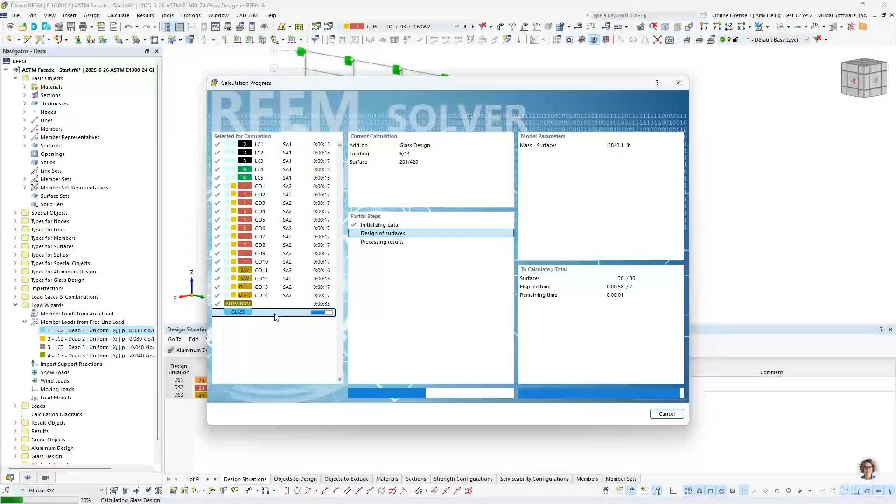So once this calculation is done, we are presented here with our results, and I will go ahead and drop down to the glass design add-on. So we can view the design ratios by surface, and we can filter here to any check that's greater than 0. And you'll notice that, very similar to example number one, we can view all of the information for the strength, principal stress design in table format, as well as our deflection checks.

And as we click on the table, we can see here it syncs up in the background to show us exactly which surface we're looking at, or I could graphically select my surface and we'll jump to the relevant design checks within the table.

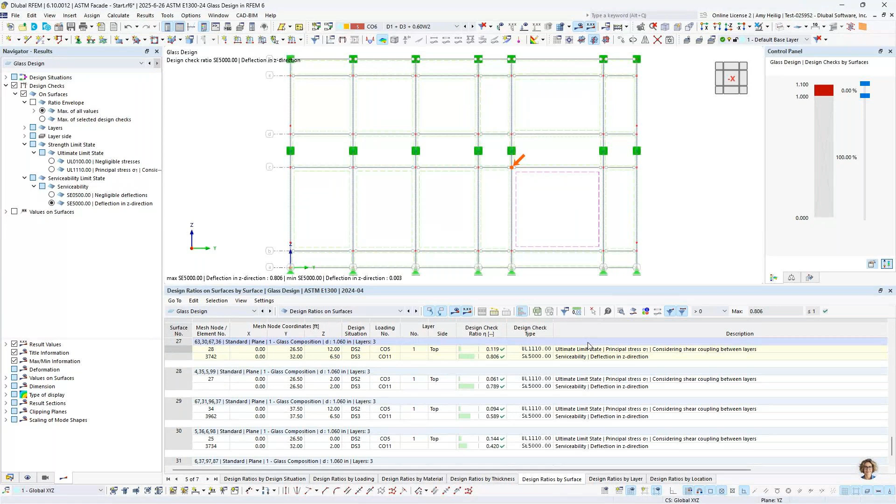Turning back to the aluminum design add-on, again, same concept here, where we can view the design ratios according to the ADM, either by member, or maybe I want to take a look at the design ratios by member set. So remember that's these continuous members in the vertical direction. And you'll notice that for either the members or the member sets, we are carrying out every single design check within the ADM. So we see all chapters listed here and all relevant design check ratios. We can always filter here to the max controlling design ratio for each member as well.

But the powerful thing that I mentioned of integrating that RSECTION profile into RFEM are those local buckling checks. So you can see here local buckling according to chapter F. We can open up the design check details.

And I could go ahead and zoom in here on my formulas to again see the references, the code references, all of the variables and input information line by line, and ultimately how we have determined this design check ratio for this member related to local buckling.

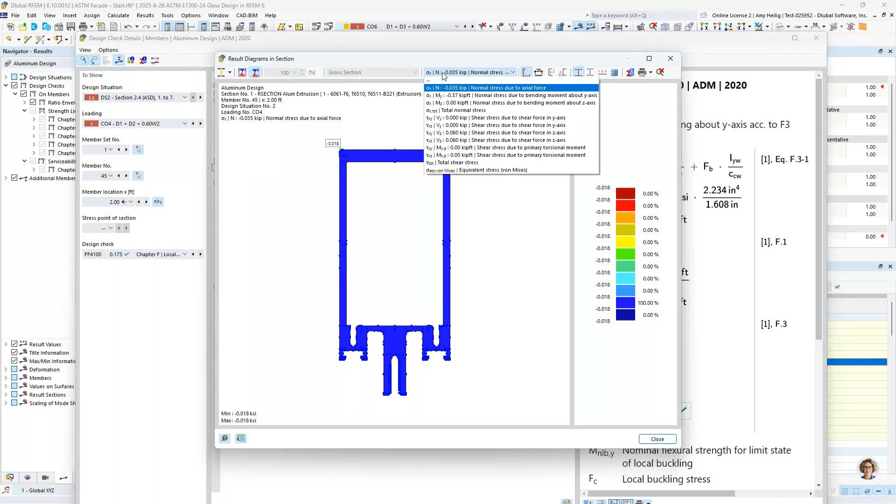We also can turn on here the diagram of the section, and maybe we drop down to the stresses and we can view any of the stresses on the element, including something like von Mises or shear stresses, to see the relevant stress under this particular loading. So serviceability checks are also available for either the members or the member set.

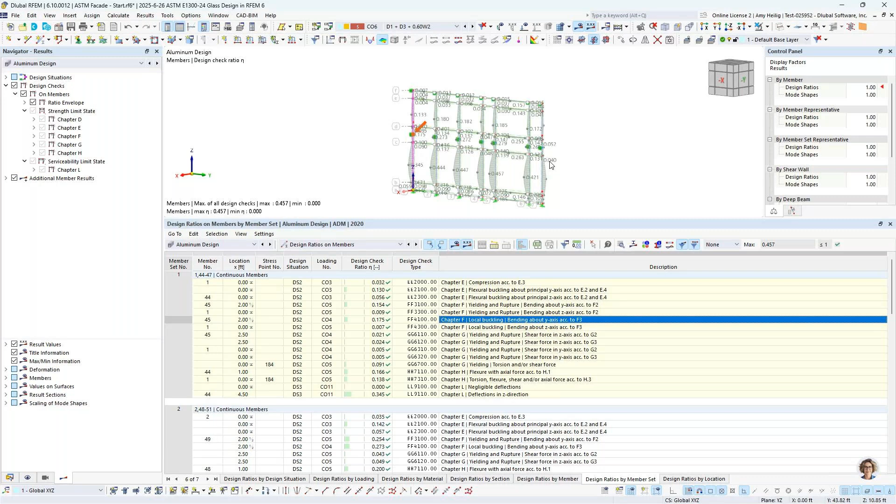So all in all, it's again very powerful that we can do the full design of the glass panels in addition to the supporting member design, whether it's aluminum, cold-formed steel, hot rolled steel, or whatever it may be. Now remember, we can always jump back to the static analysis results too to view this additional information for each one of the load combinations, including member internal forces or surfaces, surface stresses as well. Again, these are available under the various load combinations.

Okay, so we will go back to our PowerPoint here to wrap up today's presentation. Just a few words on what we're currently working on for the glass design add-on. So as mentioned, we are currently in development with insulated glass design. This is something that we had in our older version, RFEM 5, but because we rewrote everything in RFEM 6 with better technology, better graphics, better workflows, this is taking just a little bit of time to get into the

program. But once this is released, the powerful thing is that we will generate underneath the hood for something like insulated glass, a 3D FEA solid model. And this is again done all automatically within the program. And the reason why we have to do that is because we have to consider that nonlinear gas layer.

What else is nice is that when we do release this solid model generation is that for either laminated or insulated glass, we can consider the true coupling behavior between the layers for shear. So we saw in the examples today, you can either set this to fully released or fully rigid, but with the 3D model, we can take into account the true stiffness behavior of those layers. We'll be able to soon apply climatic loads, again, important for those gas layers. And we're also working on additional international standards and implementing those within this add-on.